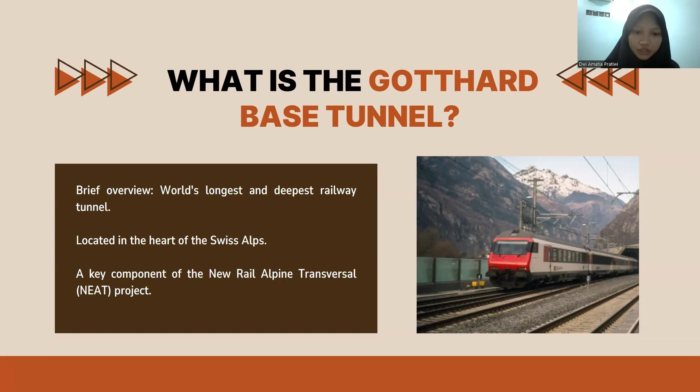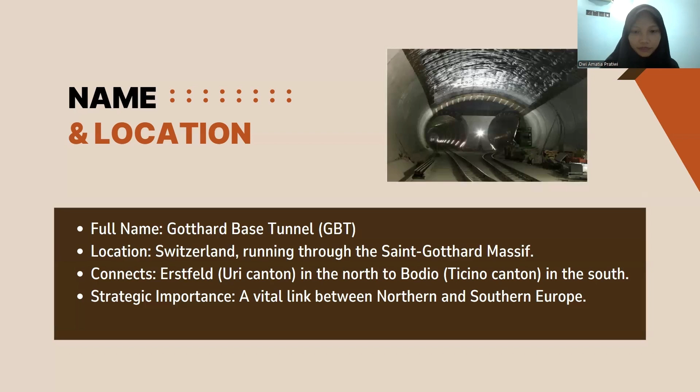The primary purpose of the GBT was to create a railway link that is not only faster but also significantly flatter and more efficient through the Alps. Before the GBT, trains had to navigate steep gradients and winding tracks over the Gotthard Pass. The new base tunnel, built at a much lower elevation, drastically reduces travel times for passenger trains. For example, the journey from Zurich to Milan is now considerably shorter. Crucially, its flat gradient means heavy freight trains can pass through without needing additional locomotives to push them up steep inclines, making rail transport much more economical and efficient.

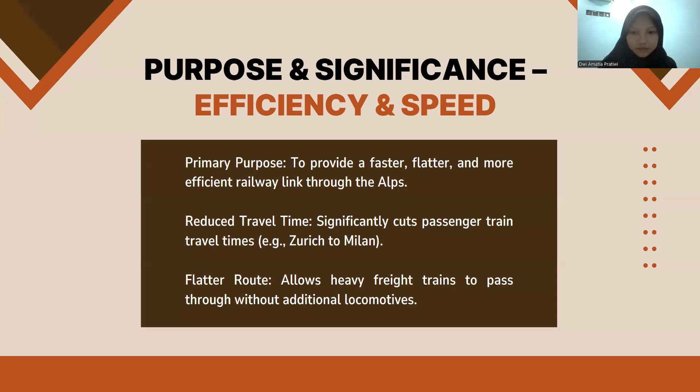Beyond just speed, the GBT plays a massive role in increasing freight capacity by providing an efficient railroad. It encourages a shift of goods transport from congested roads to railways. This brings significant environmental benefits. Rail transport is inherently more sustainable than road transport, leading to reduced CO2 emissions, less noise pollution, and less wear and tear on the delicate Alpine road networks. It's a key step towards a greener transport future for Europe.

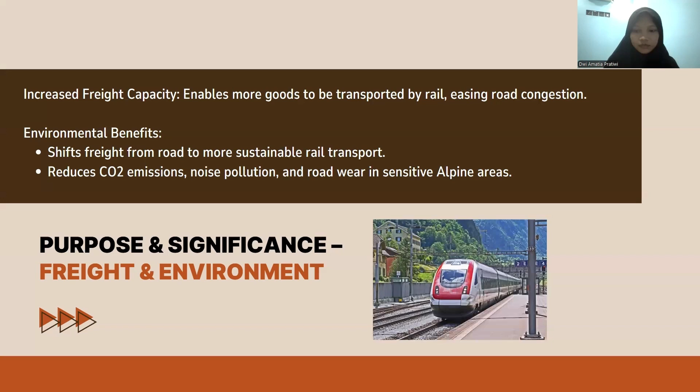From an economic perspective, the GBT significantly enhances trade and connectivity, particularly between Switzerland, Germany, and Italy. It streamlines the movement of goods and people, fostering economic growth across these regions. And of course, on a greater scale, the Gotthard Base Tunnel stands as a monumental achievement in civil engineering. It pushed the boundaries of what was thought possible in tunnel construction, showcasing incredible technological innovation and human perseverance.

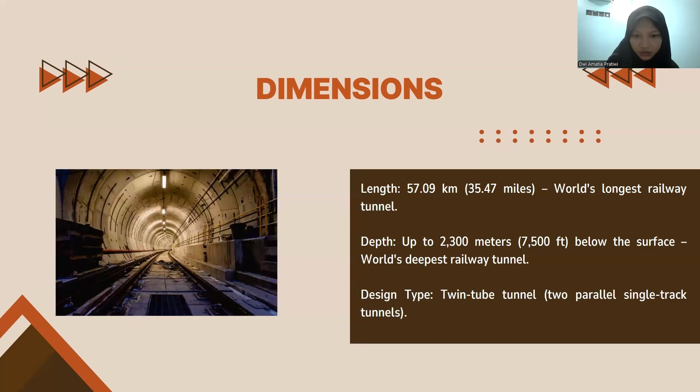Now let's dive into some fascinating technical specifications. The sheer scale of the GBT is astounding. At 57.09 kilometers, or about 35.5 miles, it is the world's longest railway tunnel. But it's not just long, it's also incredibly deep, reaching depths of up to 2,300 meters or 7,500 feet below the surface of the mountains, making it the world's deepest. The design is a twin tube tunnel, meaning it consists of two separate parallel tunnels, each carrying a single railway track. This design enhances safety and operational efficiency.

The extremely flat gradient, with a maximum of only 0.7%, is a key design feature that allows for high speed and heavy freight transport. For safety and maintenance, the two parallel tunnels are connected by cross passages every 325 meters. The construction involved excavating an astonishing 28 million tons of rock. The tunnel's interior is primarily lined with prefabricated concrete segments, which were then installed. Given the immense geological pressure at such depths, special high-strength concrete was crucial for the structural integrity of the tunnel.

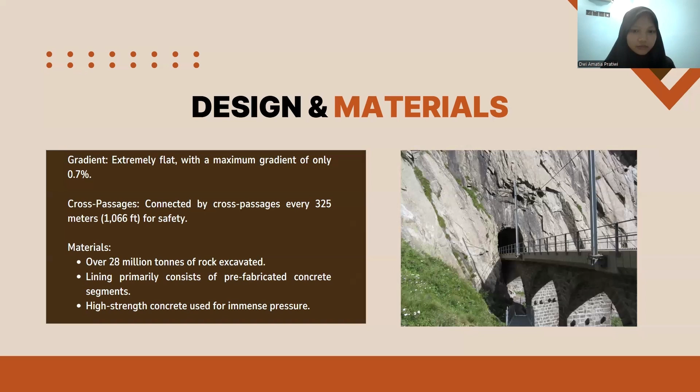The construction of the Gotthard Base Tunnel was a monumental undertaking spanning approximately 17 years, from its start in 1999 to its full commercial operation in 2016. Key milestones included the breakthrough in 2010 when the two main sections of the tunnel met, and its official opening in June 2016. The entire process involved several main stages: extensive planning and geological surveys, the construction of crucial access tunnels, the primary excavation, and finally the installation of the tunnel lining and necessary railway infrastructure.

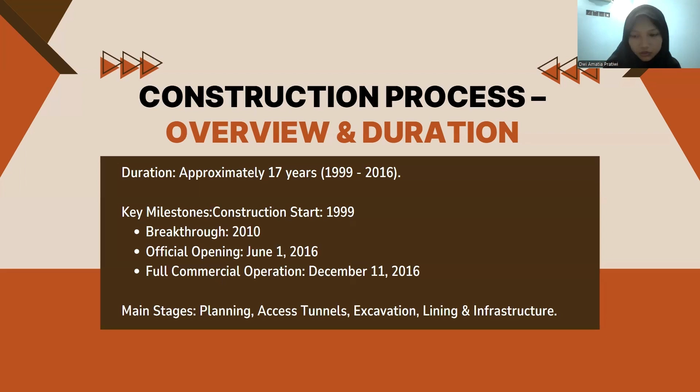One of the biggest challenges was the tunnel's immense length. To overcome this, engineers adopted an innovative multi-point excavation strategy. Instead of just digging from the two ends, they created several intermediate access points such as Sedrun, Faido, and Amsteg.

This point involved digging vertical shafts and additional access tunnels deep into the mountain. This allowed for simultaneous excavation from 5 different locations, dramatically speeding up the overall construction time and making the project feasible within a reasonable time frame.

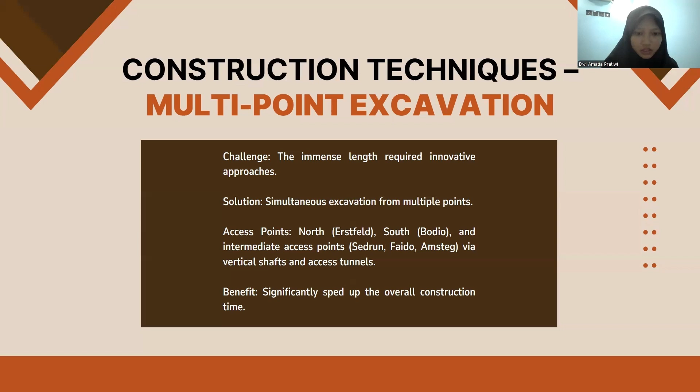The excavation itself primarily relied on two methods. For about 80% of the tunnels, massive tunnel boring machines were employed. These incredible machines, some up to 400 meters long, efficiently drilled through stable rock.

However, for the remaining 20%, especially in areas with complex or fractured geological conditions, conventional drilling and blasting techniques were necessary. This hybrid approach allowed engineers to adapt to the varied and challenging rock formations encountered deep within the Alps.

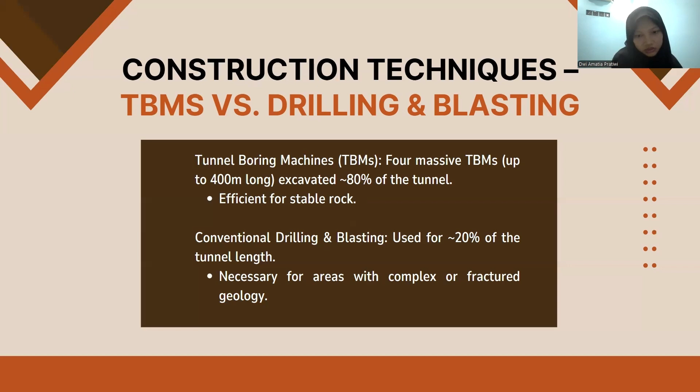Building through the Alps came with significant challenges. The geological complexity was immense, with engineers encountering everything from extremely hard, solid granite to fractured, unstable, and even water-bearing rock zones. This demanded constant adaptation of excavation methods. Another major hurdle was the high temperatures deep inside the mountain, which could reach up to 50 degrees Celsius due to geothermal heat.

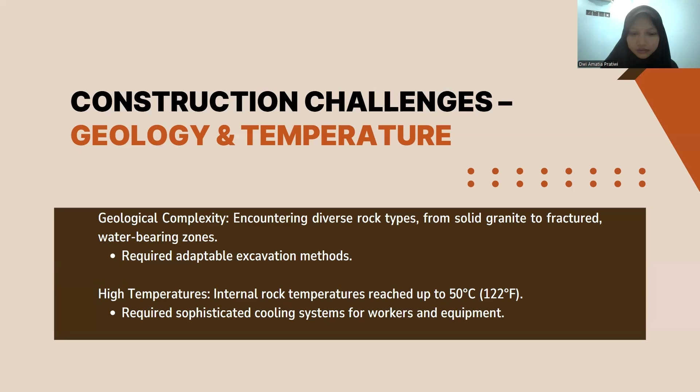Sophisticated cooling systems were absolutely essential to ensure the safety and productivity of the thousands of workers, as well as the proper functioning of equipment. Water ingress was another persistent challenge, with massive amounts of groundwater flowing into the tunnel, requiring continuous pumping and treatment.

The sheer logistics of the project were staggering, moving 28 million tons of excavated rock out of the mountain and bringing in all the necessary construction supplies to the remote sites.

Above all, safety was paramount. Despite rigorous protocols, the inherent risks of such a large-scale underground project sadly led to the loss of 9 workers' lives, a stark reminder of the human cost of such ambitious undertakings.

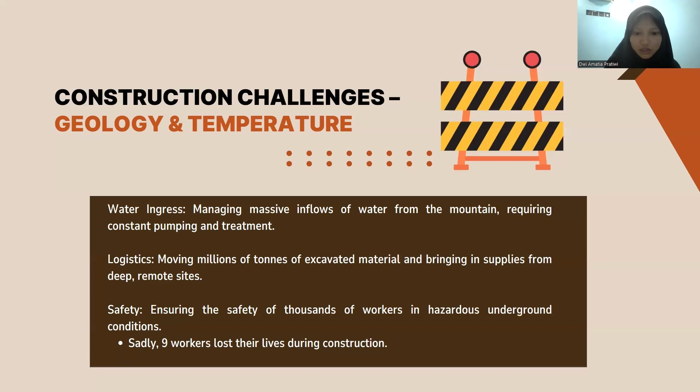A project of this magnitude required collaboration from numerous stakeholders. The primary client and owner was AlpTransit Gotthard AG, a subsidiary of the Swiss Federal Railways. The Swiss Federal government provided the vast majority of the funding and crucial political support.

The actual construction was carried out by various consortia of international construction companies such as ARGE Transtec Gotthard and Consorzio TAT. Additionally, a multitude of specialist engineering and consulting firms were involved, providing expertise in tunnel design, geology, and railway systems. This truly was a collaborative effort on a grand scale.

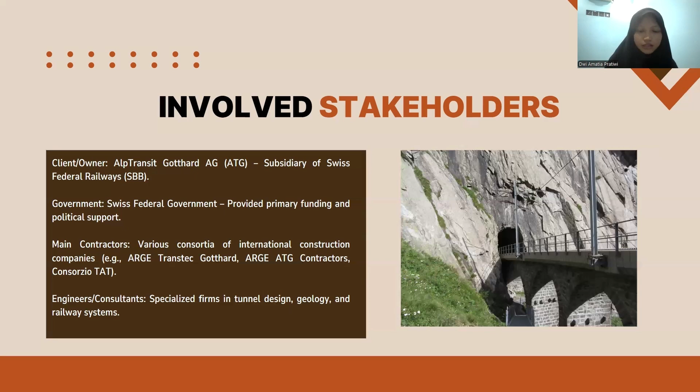The Gotthard Base Tunnel has a significant positive environmental impact by shifting a substantial amount of freight traffic from roads to rail. It helps alleviate chronic congestion on the narrow and winding Alpine roads. This shift also leads to lower greenhouse gas emissions, as rail transport is generally more energy efficient per ton kilometer.

Ultimately, by centralizing traffic in the tunnel, it helps protect the sensitive ecosystem of the Alpine region from the adverse effects of road transport.

From a social perspective, the project brought considerable benefits. During its long construction phase, it significantly boosted local economies by creating thousands of jobs for engineers, construction workers, and support staff. Post-completion, it has vastly improved mobility for both residents and tourists, making travel across the Alps faster and more convenient. This enhanced connectivity can also lead to new opportunities for regional development.

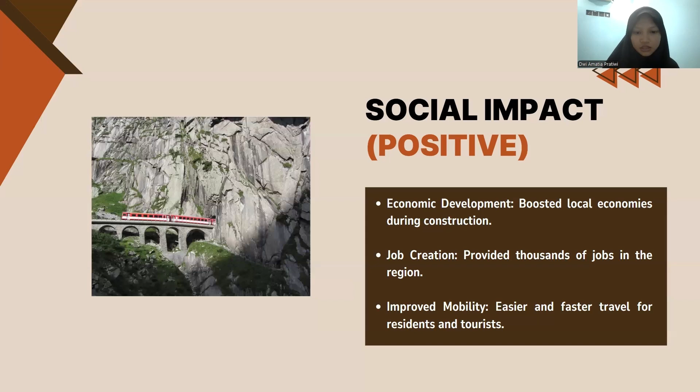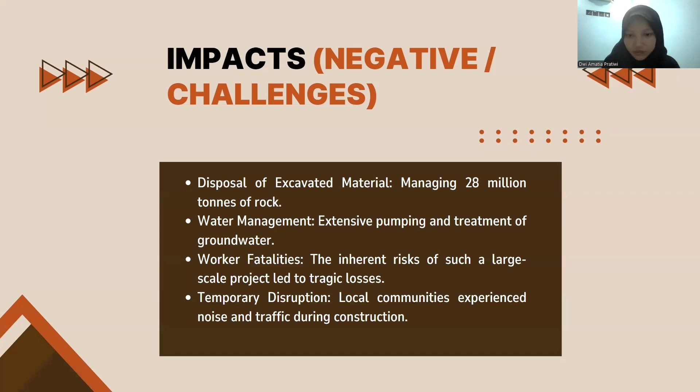However, it's important to acknowledge the negative impacts and challenges faced. The disposal of 28 million tons of excavated rock was a massive undertaking requiring careful planning to minimize environmental harm. Managing the extensive water ingress and the treatment of groundwater was also a continuous challenge. As mentioned, the inherent dangers of tunneling at such depth tragically resulted in the loss of 9 workers' lives. Additionally, local communities experienced temporary disruption.

Now, I'd like to share my personal opinion and conclusion. For me, the Gotthard Base Tunnel is an undeniable testament to human ingenuity. It showcases how, with advanced engineering and unwavering determination, we can overcome even the most immense natural barriers. This is truly a future-oriented feat of infrastructure, embodying a strong commitment to sustainable transport and delivering long-term economic benefits not just for Switzerland but for all of Europe. The project's success, despite facing significant technical and logistical challenges, is nothing short of impressive and inspiring.

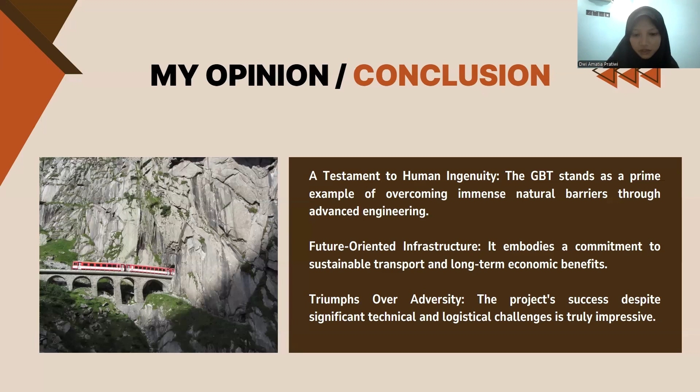Furthermore, the Gotthard Base Tunnel offers invaluable lessons for future large-scale infrastructure projects, particularly those in complex geological environments. It demonstrates the importance of meticulous planning, innovative techniques, and robust safety measures.

More than just a tunnel, it stands as a powerful symbol of international cooperation, a commitment to environmental conscience through sustainable transport, and a grand vision for efficient, integrated mobility across a continent. Its legacy will undoubtedly continue to shape how we approach infrastructure development for generations to come.